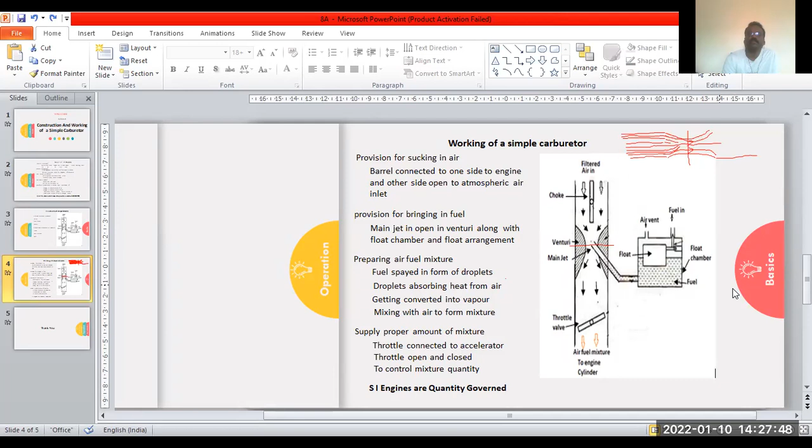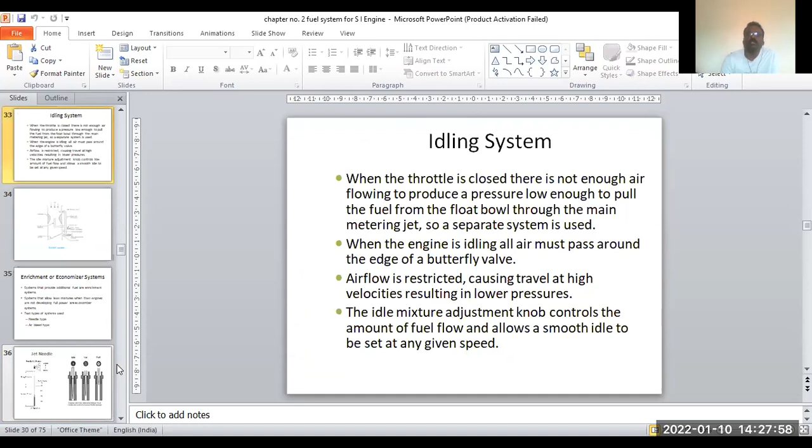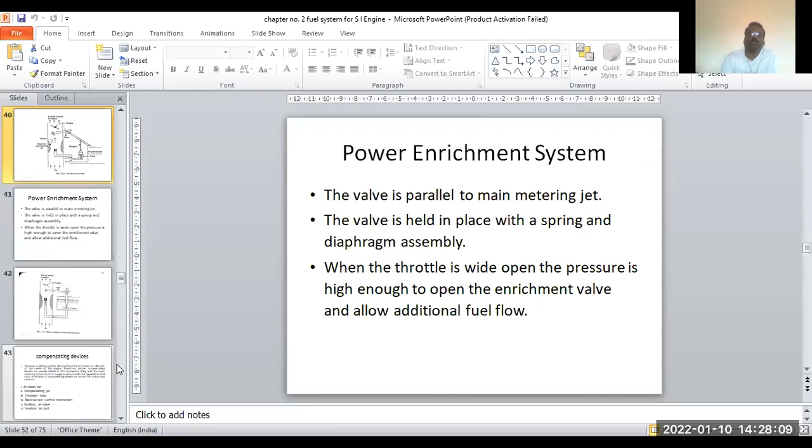That is where the role of the throttle coming into picture, throttle valve coming into picture. What is this throttle valve? Throttle valve काय आहे बघूया आपण. Throttle valve. कुठं दिसतंय का बघूया. Throttle valve. आहे कुठंतरी. Just I want to search it. मी आता कुठंतरी पाहिलंय की... okay, doesn't matter. I will show you.

So for that, what we have to do is, this is a circular pipe and this is a disk. When it is horizontal, the pipe is vertical and the disk is horizontal, it is closed. Passage is closed. When it becomes tilted like this, slowly as you go on tilting, the gap here goes on increasing.

And we're saying that it is opening. And when this also becomes vertical, this is fully open. So this is your throttle valve and it is in the form of a disc, and the valve is going to open or close.

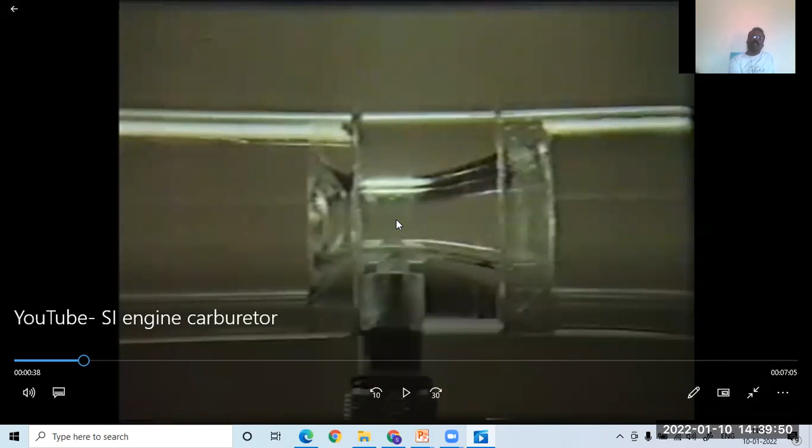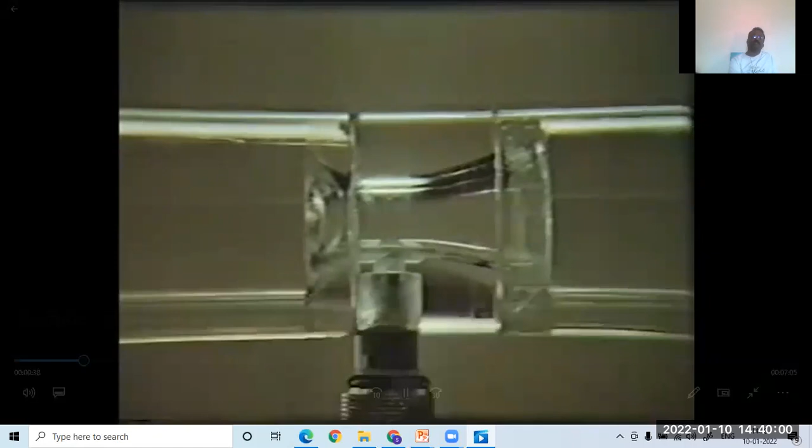Air is drawn through the model in the same way that an engine draws air through a carburetor. If smoke is introduced into the model, the movement of the air may be seen.

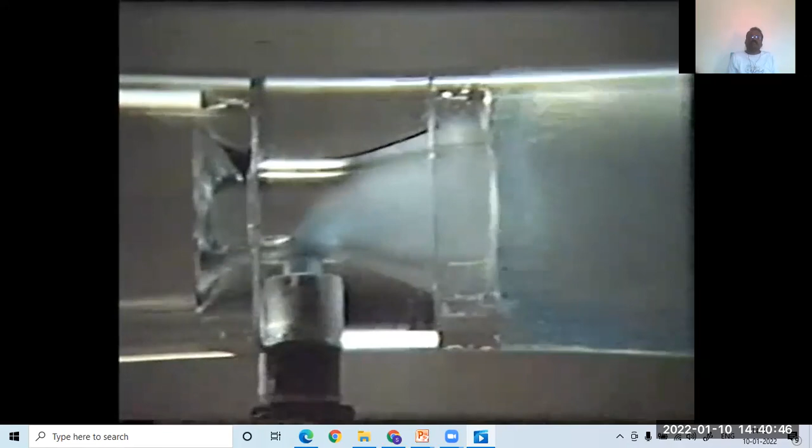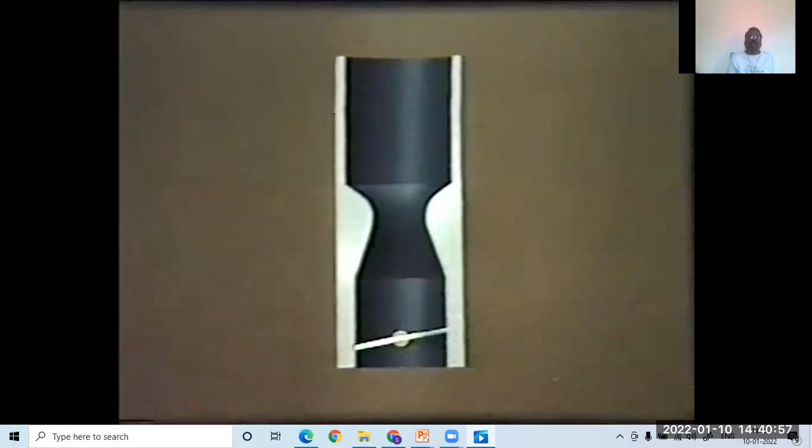In a simple single jet carburetor, there would be a venturi, a throttle, a jet, and a float chamber, which contains the petrol. The flow of air through the venturi causes a pressure drop.

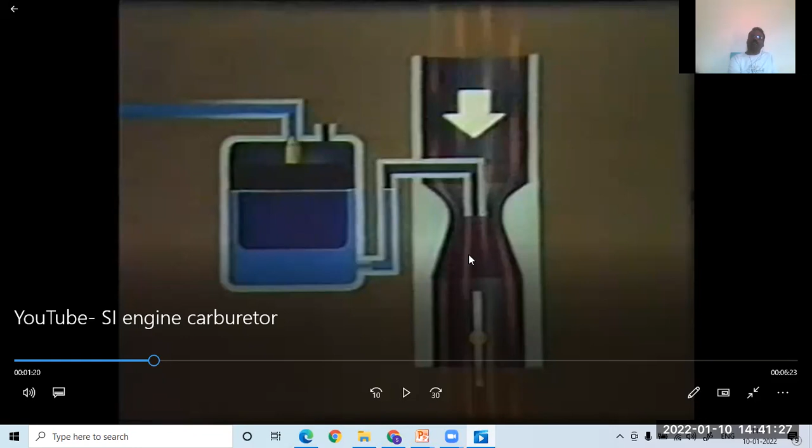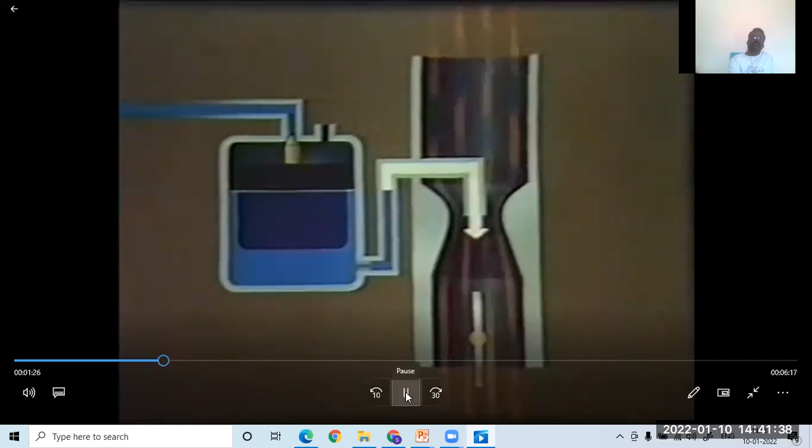The flow of fuel is controlled by the difference between pressure at the nozzle of the jet and the atmospheric pressure in the float chamber.

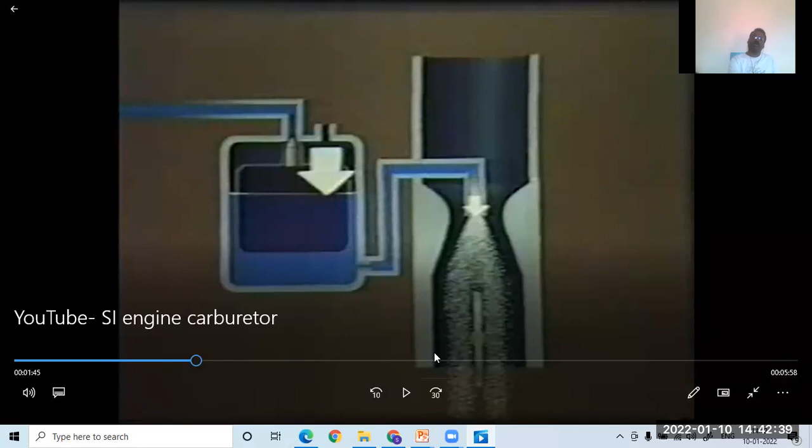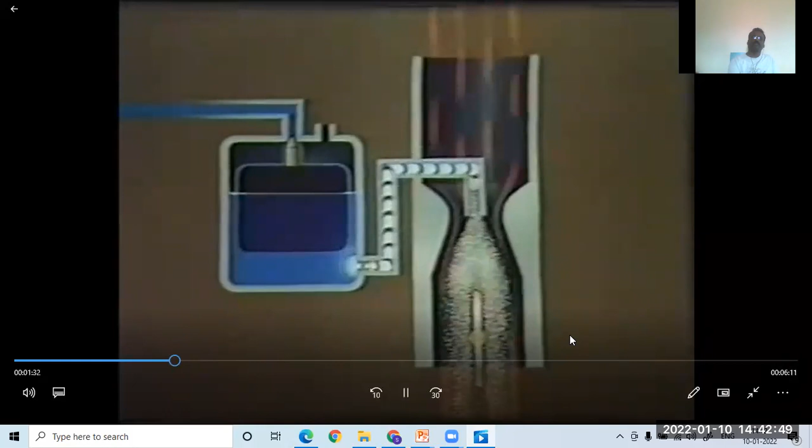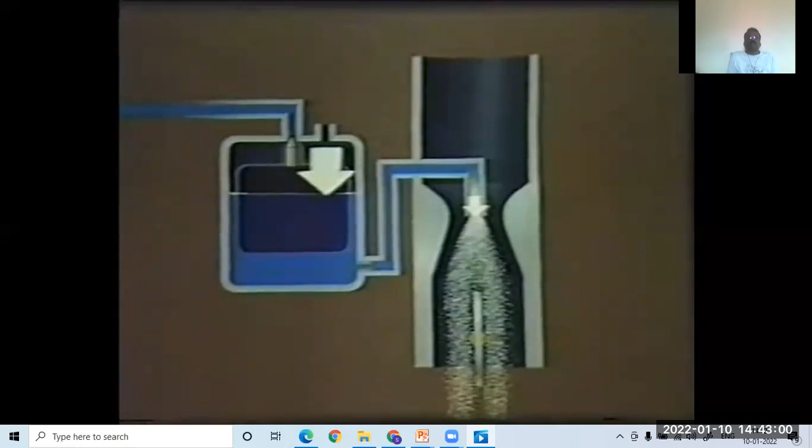The flow of fuel is controlled by the difference between pressure at the nozzle of the jet and the atmospheric pressure in the float chamber. The size of the pressure drop governs the operation of the engine, which responds to the position of the throttle.

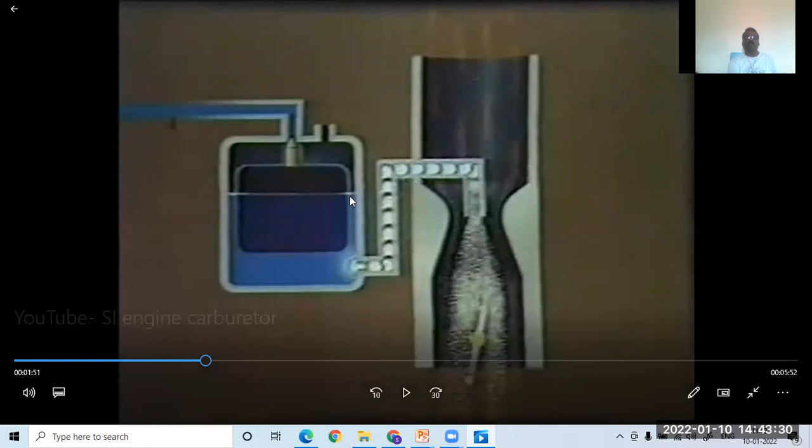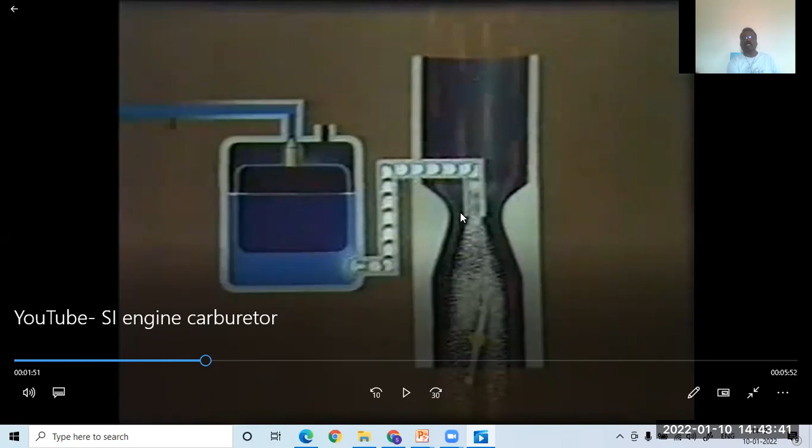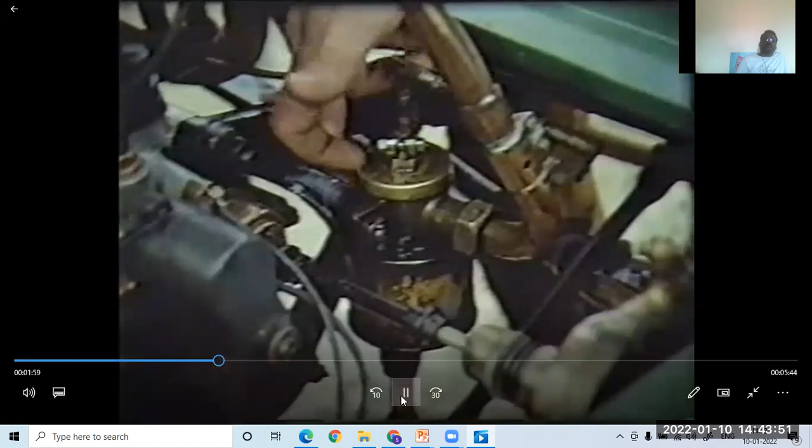Developments of the petrol engine have produced efficient and sophisticated carburetors to meet the demands of modern motoring. The job is to deliver the right mixture of fuel and air to the engine under all conditions, and to keep the mixture in the correct proportions, more air has to be introduced. This is done by an air bleed, which restricts the amount of fuel reaching the engine.

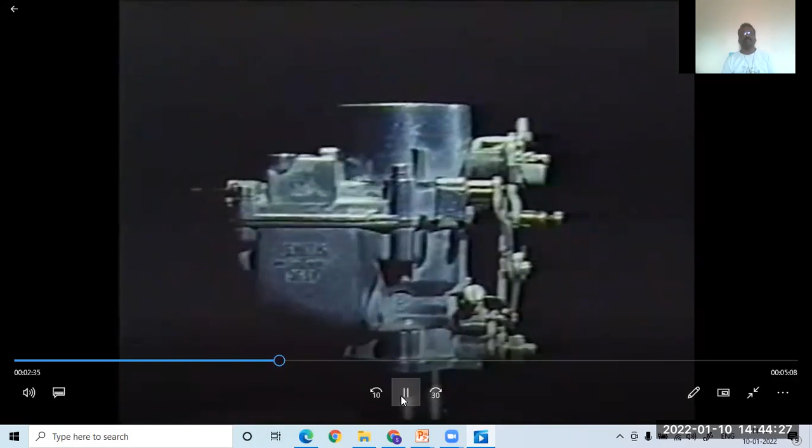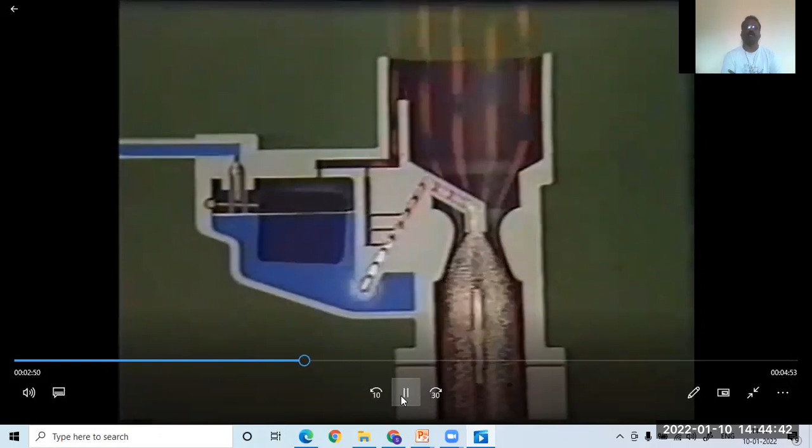The air bleed just consists of special channels within the carburetor, and the flow of fuel through the main jet draws in the additional air. When starting from cold, a richer mixture is needed.

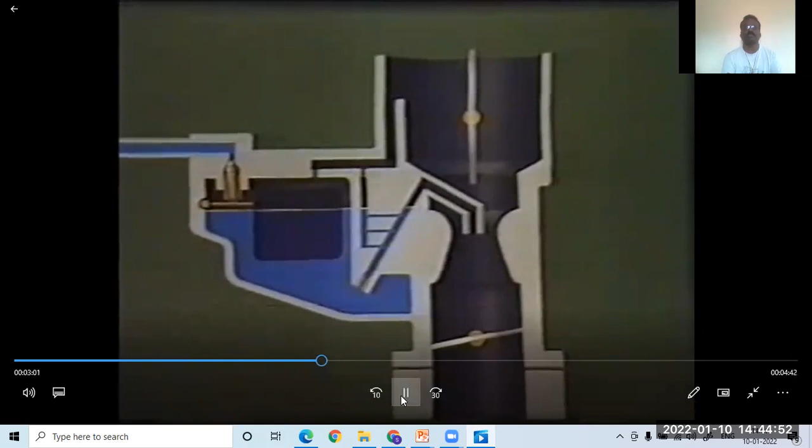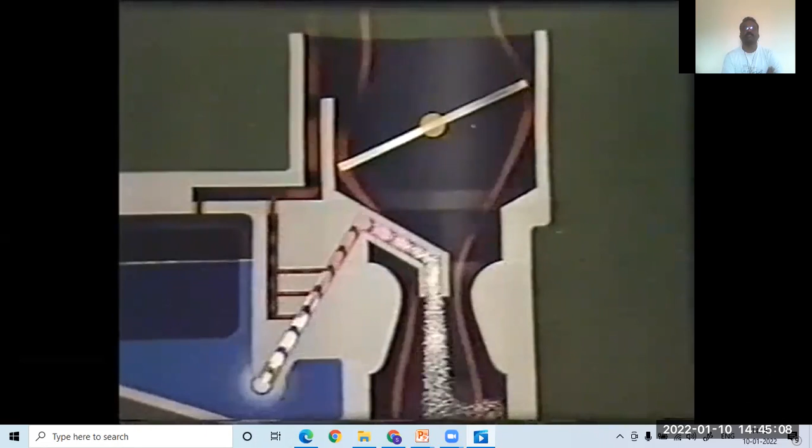Here the choke plays its part. To start the engine, the choke is closed, which slightly opens the throttle. This is the choke valve. So when the engine is turned over, the suction acts mainly on the fuel jet, and together with the small amount of air, produces a richer mixture for starting when cold.

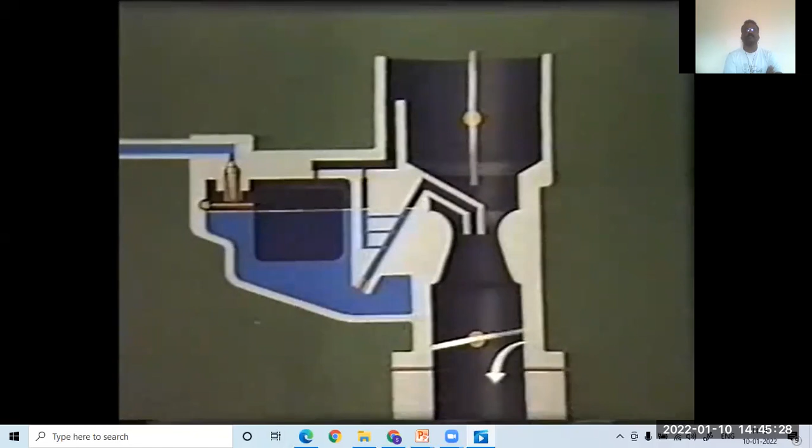At normal idling speed, the airflow is not strong enough to pull sufficient fuel into the venturi to keep the engine running. To do this, a small amount of petrol is injected into the side of the throttle nearest the engine. This is the idling jet. Petrol is delivered from the float chamber, air is drawn from the upper part of the venturi, and sufficient mixture is provided for the engine to idle.

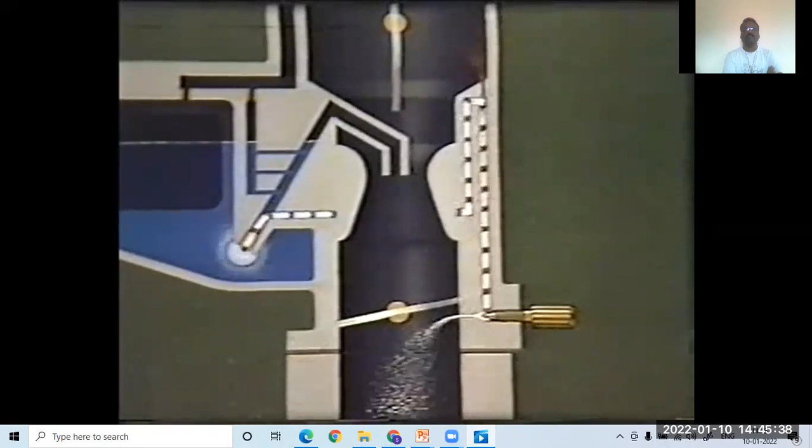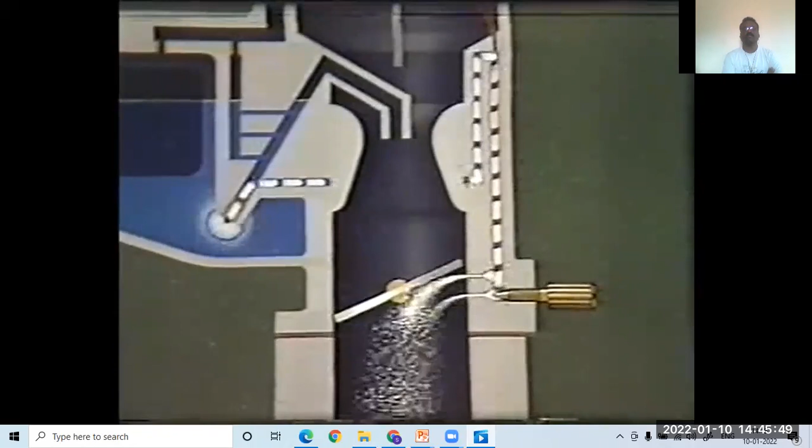In normal acceleration, a progression jet provides more petrol until the main jet takes over.

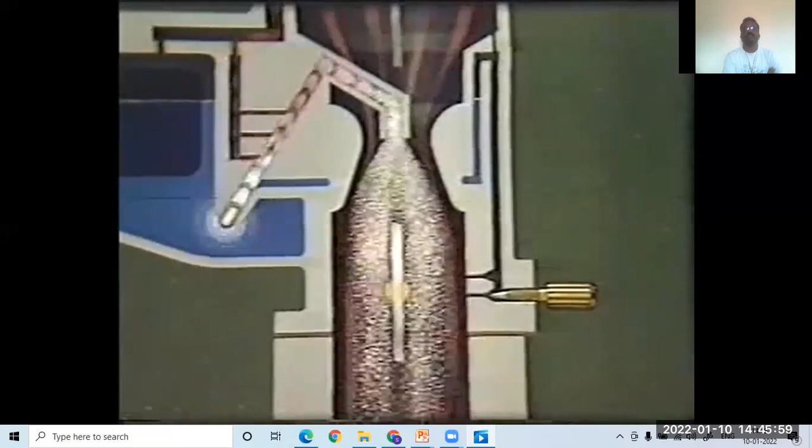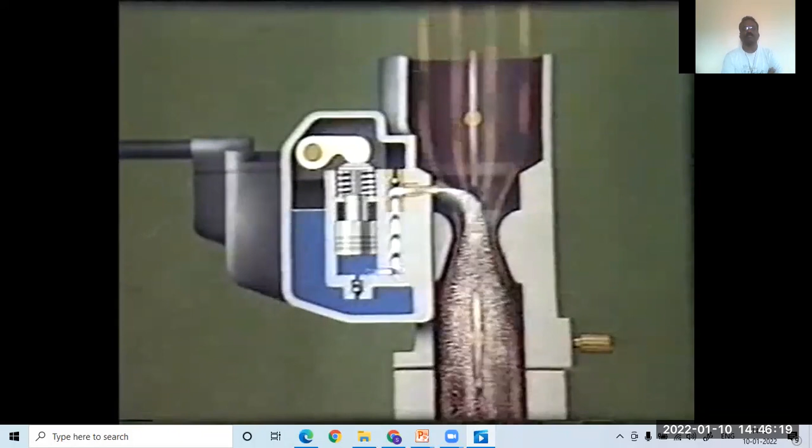Sudden throttle opening provides more air, but weakens the mixture. There is a lag whilst extra fuel is drawn into the venturi to meet the new conditions. And the accelerator pump, by injecting a quantity of fuel into the airstream, restores the mixture strength, and sharp acceleration can take place. Essential in conditions like these.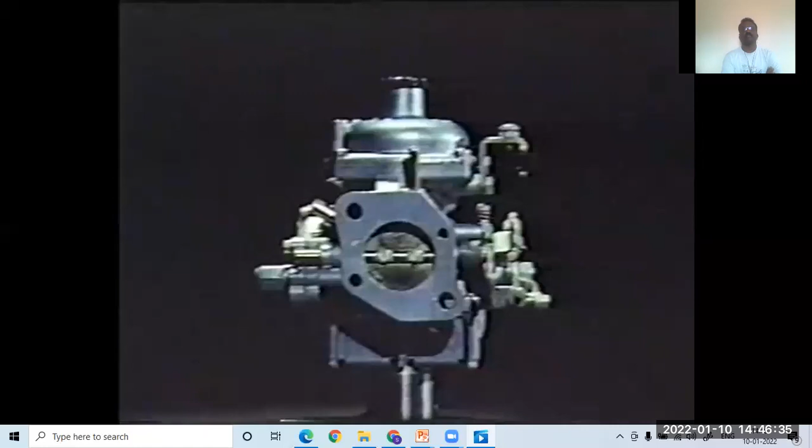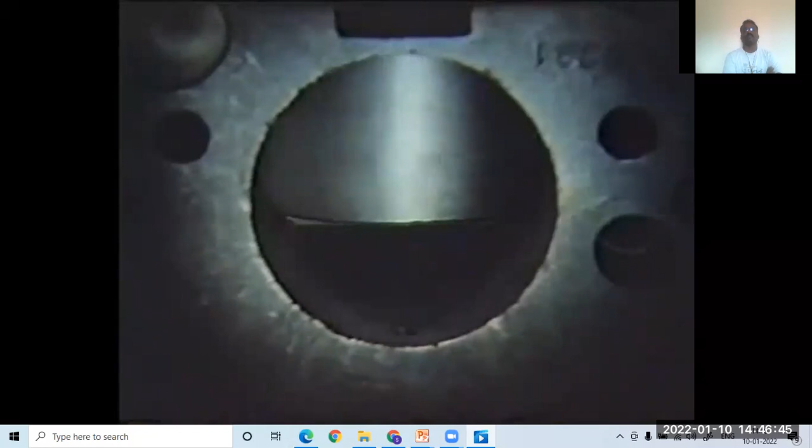There is another type of carburetor. It is called a variable jet carburetor. One side of the venturi is replaced by the bottom of a piston, which moves up and down in a finely machined cylinder. When the engine is at rest, the pressure on both the underside and top side of a piston is atmospheric and therefore equal.

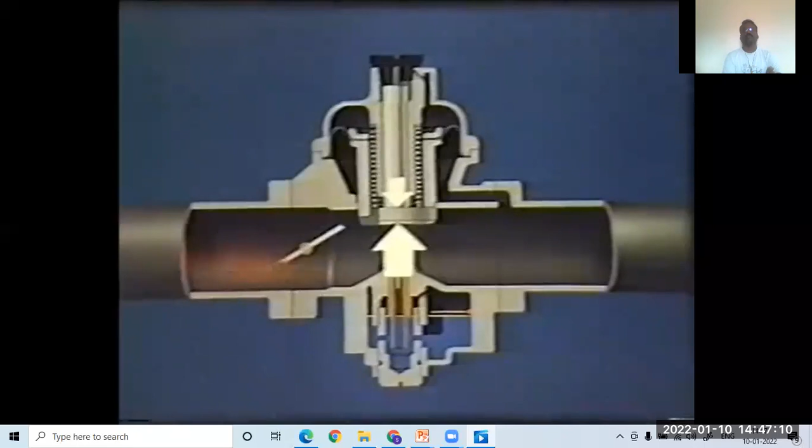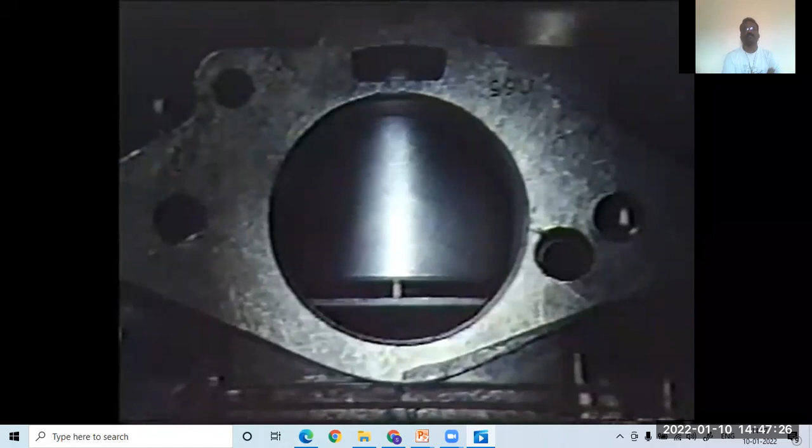With the engine running, air is drawn out of the interior of the dome. The pressure falls, and the piston is lifted by the greater atmospheric pressure below. When the engine stops, the air flows back again, and the piston falls. Air pulls droplets of petrol into the venturi, and to regulate the flow, a graduated needle is held by the piston in the jet. As the throttle opens, air is drawn through the carburetor, the piston rises, and the fuel that is needed is pulled into the airstream.

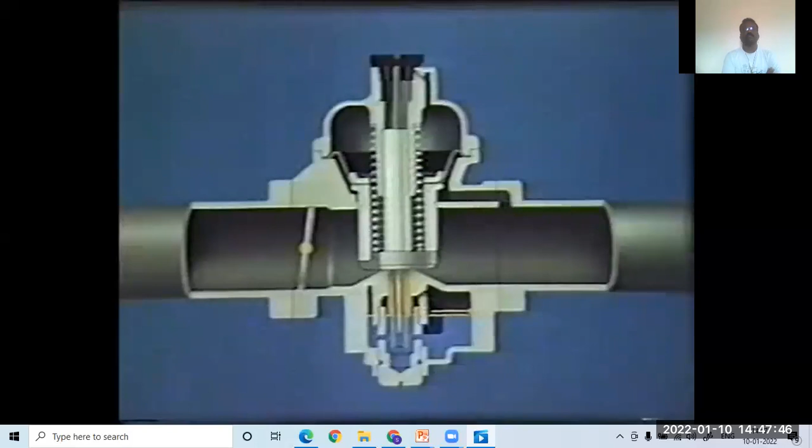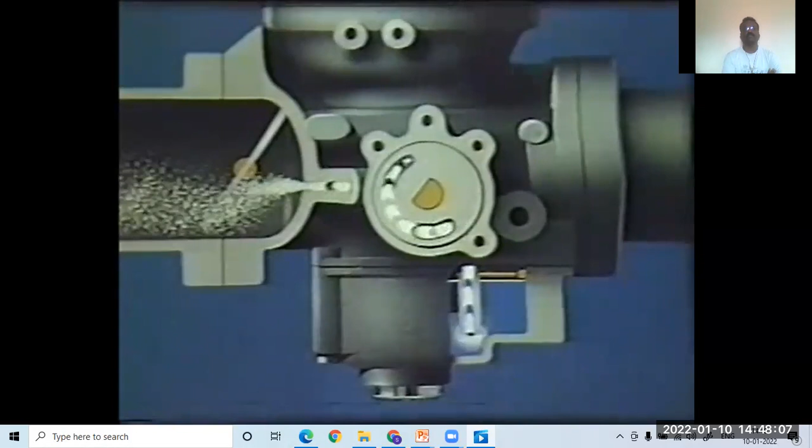For cold starting, there is a disc valve, operated by the choke, in which a series of holes of different diameters are drilled. The choke control rotates the disc, and in the full rich position, all holes are open to the flow from the float chamber. As the engine warms up, the choke is pushed back in. Fewer and smaller holes provide the fuel, and the mixture returns to normal.

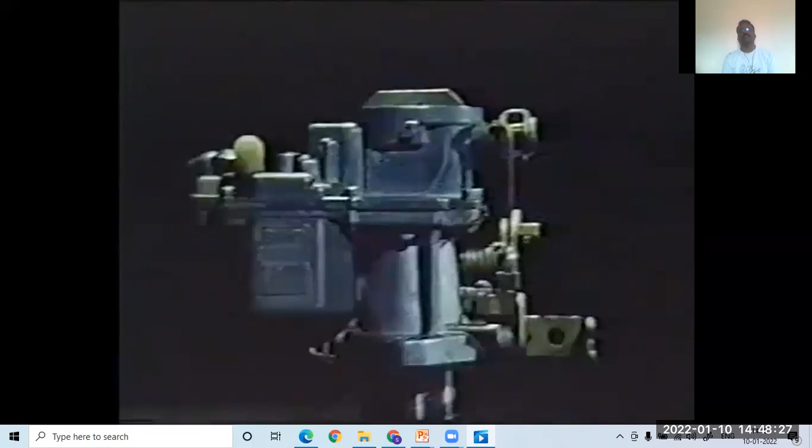The carburetors we have described are only two of many kinds. Although the principles are the same, individual engine requirements have produced many modifications of design and manufacture. In higher performance motor cars, maximum power is obtained by drawing in as much mixture into the cylinders as possible. A single carburetor is not always sufficient for this purpose. And one development which meets the need is the twin choke carburetor.

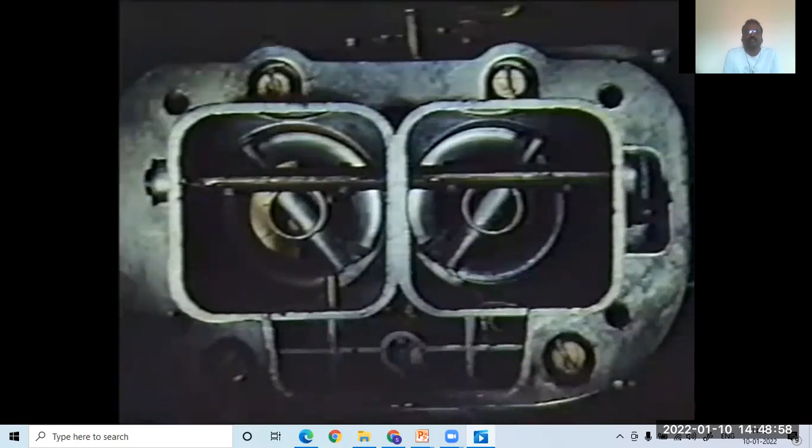It consists of two carburetors of different diameters side by side in the same casting. At lower revolutions, the needs of the engine are met by the smaller carburetor. At higher revolutions, the larger diameter carburetor comes into operation, greatly increasing the flow of mixture into the engine and improving its performance. The task is always the same. It is simply to deliver the right mixture of fuel and air to the engine at precisely the right moment.

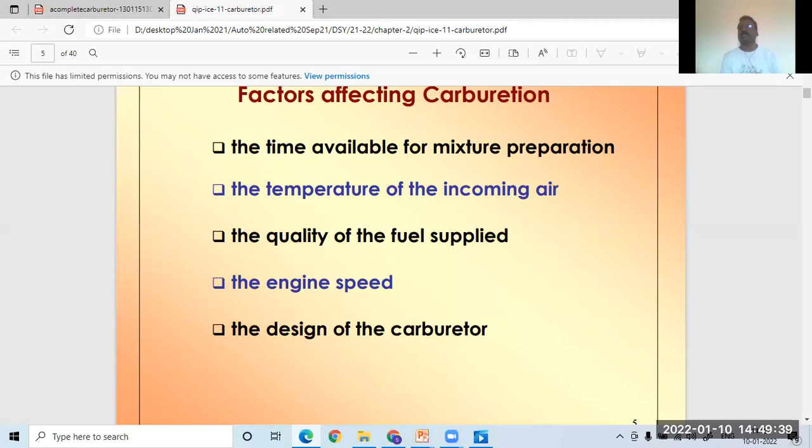Okay. Yes. So I think we have discussed so many things.

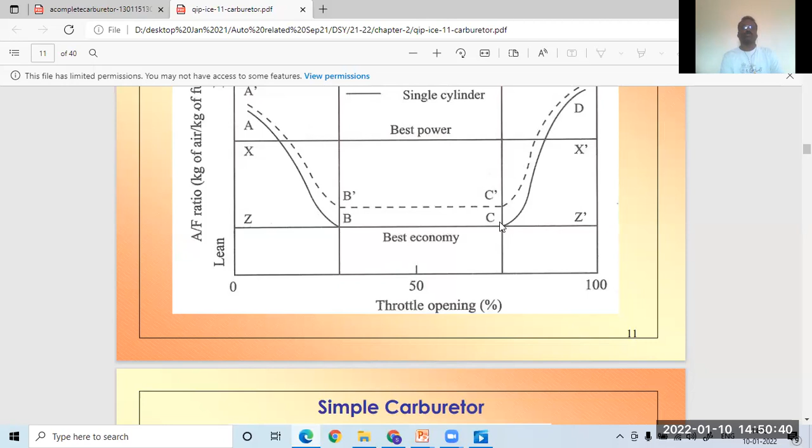So in the intermediate position of the throttle, that is the accelerator, you are getting best economy. At a very low position of the throttle, or less accelerator pressed, and at very high accelerator pressing, both times you are supplying rich mixture, and in the remaining timing you are supplying lean mixture. We can see over here the curve is something like this. Okay, so this was what we have discussed.

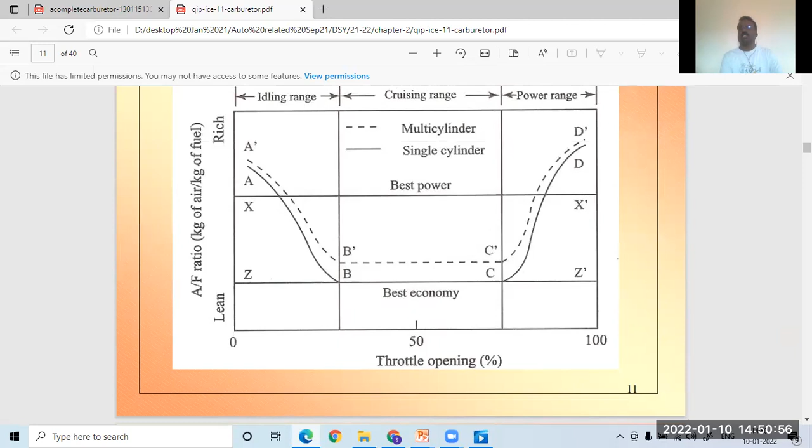Now these are two lines: the dark line corresponding to single cylinder engine and dotted line corresponding to multi-cylinder engine. That is not much different. The curvature remains the same. Now the remaining part, I think the question one of our friends asked was regarding the rich mixture. So we have different systems, whatever you have seen in the video now. So many systems are there. We will be discussing different systems in a carburetor one by one in the next lecture.